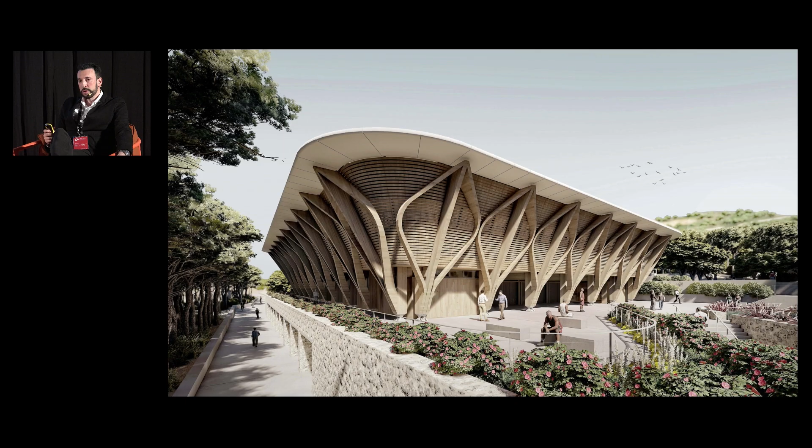Not for the award itself, but as a symbolic milestone that timber probably could be the timber material of the 21st century. And for this reason, I would like to dedicate this award to Mr. Elias Angelopoulos, who is the organizer of the Architect Show and a very good friend and partner the last 20 years, an innovative mind and passionate about timber that we do a lot of trips and events together, and I'm really thankful. The second occurrence is that Andrew was my tutor in the Master in Mass Timber Design in the Institute for Advanced Architecture of Catalonia, and together with Rebecca, we had a great time. We absorbed a lot of information about how timber can work, design for disassembly, and all the different inventions that we can implement.

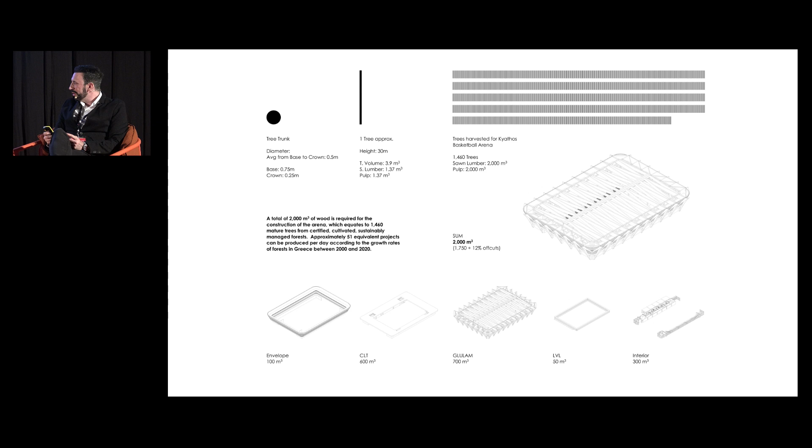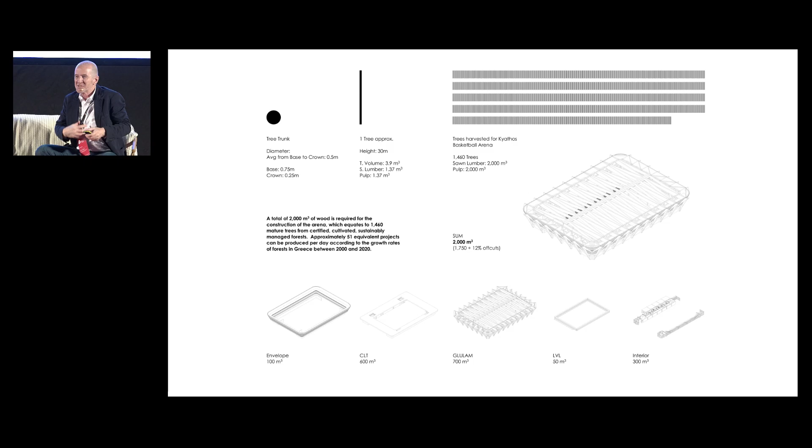Kalispera. I'm sorry to speak in English the whole way through. I think I might actually sit down. I don't think I've ever done a talk on a sofa. You can stand up if you want. Well, I think it's quite leisure.

So this is us. We're Waugh Thistleton architects. We are an architecture practice based in London. We work all over Europe and in the US. And since 2016, we've only designed and built timber buildings.

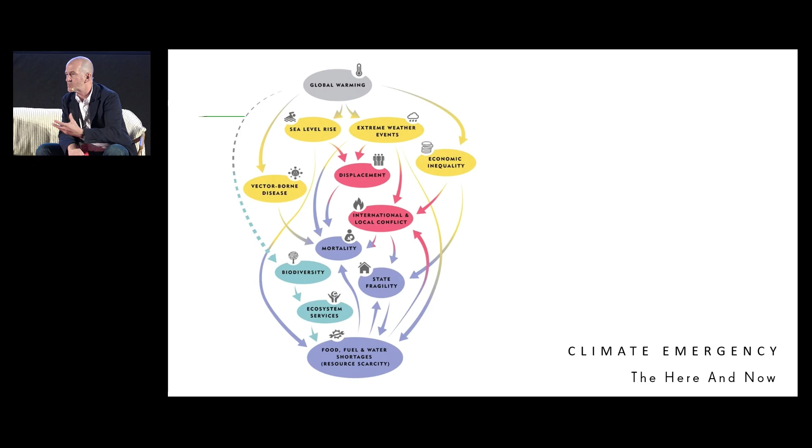The reason why we work in timber is primarily around climate change. That was the inspiration for us, the climate crisis. When people talk about climate change, you always see lots of graphs and Gantt charts and numbers. But actually, the reality of climate change is that it's here and now, that we are living in a climate crisis. And that climate crisis is evidenced by things like right-wing politicians and mass migration and all the turmoil of the world that we live in today.

The reason why I wanted to point this out is because architecture and construction play a major role in this. 40% of our global emissions are from the built environment, and by 2030, 50% of those will be around the building materials that we use. So even right now, when we're building less than we'll be building in the future, just the carbon emissions from making concrete are about 4 times the emissions from airline travel. So this is on us.

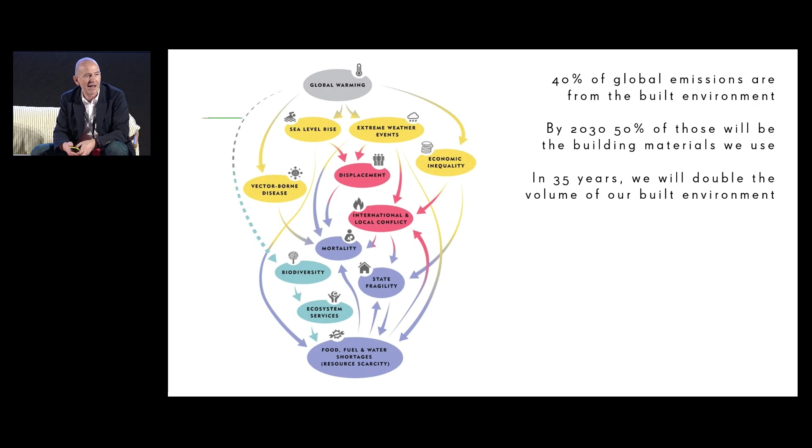This is on architects. This is our responsibility to make a difference, to make a change, and to really transform the way that we think about success in architecture. To think beyond the shocking, to think beyond the awesome, and to start to think about our responsibilities both socially and environmentally.

And so for us, that really is about 3 pillars of practice. That's about design, we are a design practice. That is about research, so about a third of our practice is pure research. And that's also about sharing knowledge, whether it's working with fantastic students and architects now, or doing talks like today. It's about sharing our knowledge, sharing our understanding, and learning from that process.

This began for us in 2003 when we built our first mass timber building, our first cross-laminated timber building. Since then, we've completed about 35 projects in timber. This one in 2008 was particularly important because it was a 9-story building, when really cross-laminated timber and glulam were used about small buildings, schools and health centers, single-story, 2-story buildings. In 2008, we built this 9-story building.

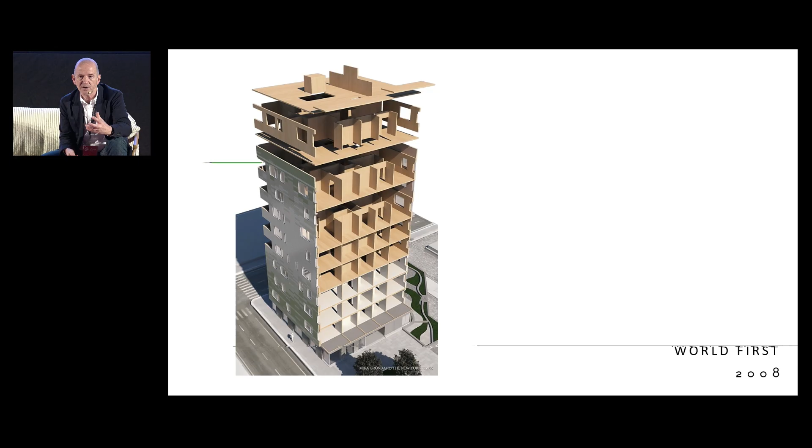The idea behind that was really thinking about how we could take a low-carbon material and how we could think about that material in terms of an urban scale.

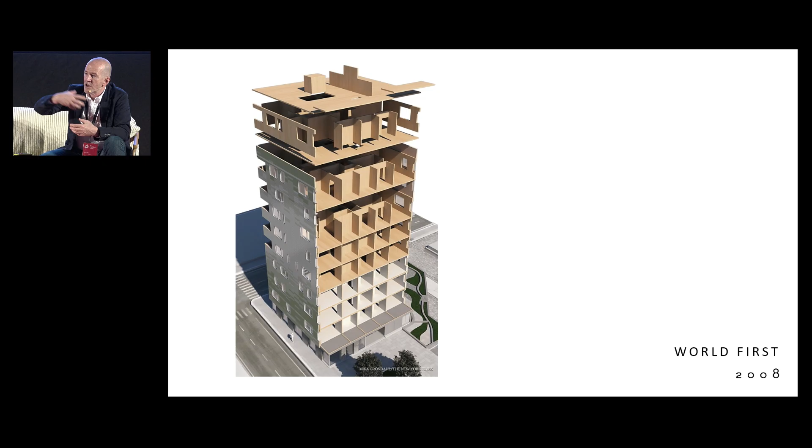How can we think about a viable alternative to concrete and steel in timber? This building saves over 1,000 tons of carbon dioxide stored in the timber of the building. It took 4 people 27 days to make, no tower crane, much fewer foundations, and it was a safe and

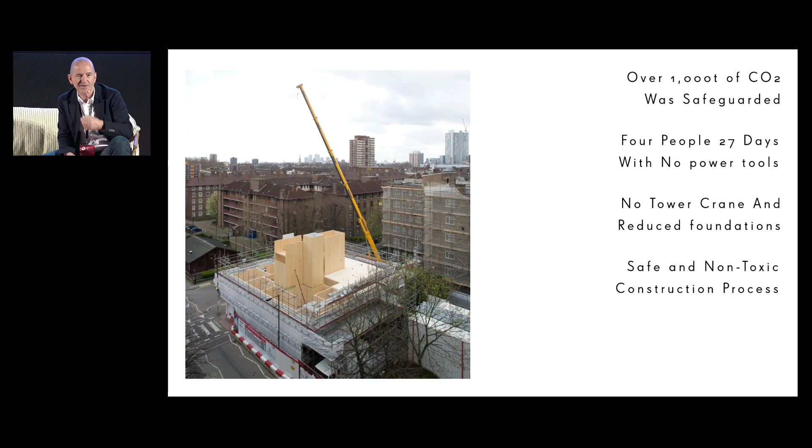Fast, non-toxic process. You can see a very simple construction, and it's 15 years ago now. A very simple construction, so just 7-centimeter angle brackets and 12-centimeter screws.

And the entire building, in fact, I walk past this building nearly every week, taking my daughter to swimming lessons. And so I see the building every week, and it's still there and still looking good.

But beyond the environmental was also the fact that it's very quiet, has great performance, and because it's prefabricated, not only took fewer people to build, but far fewer deliveries onto site.

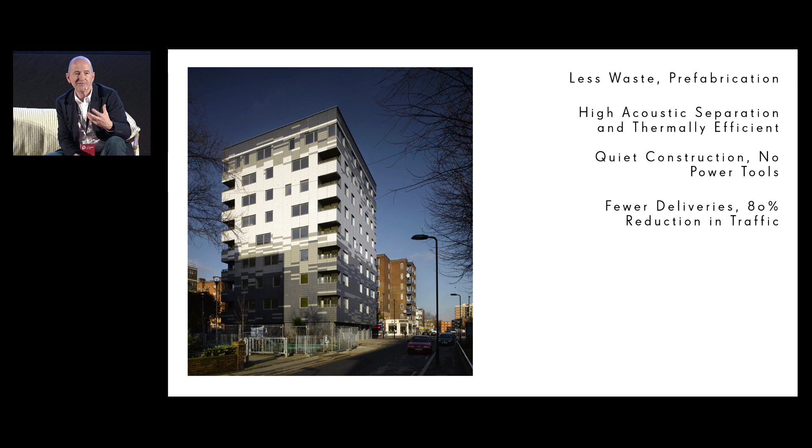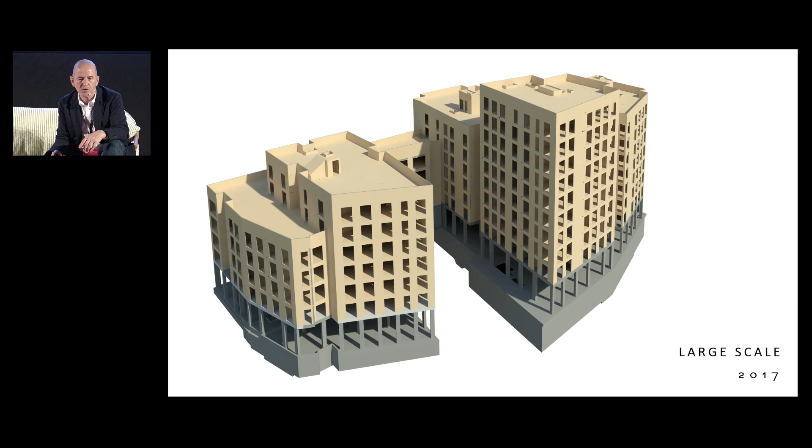And since then, the scale of the work that we've done has changed. This building in 2017 was 22,000 square meters, 10 stories tall. And in concrete, it would have weighed over 10,000 tons in concrete, but in timber weighed less than 2,000 tons.

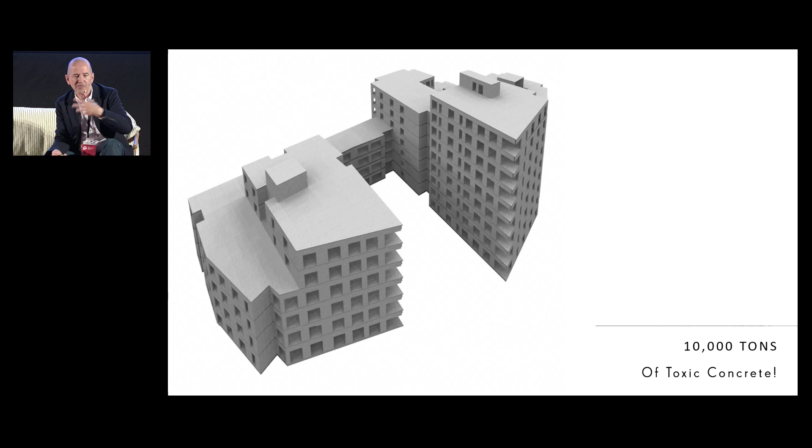So you can see the amount of deliveries to site, the amount of concrete involved, compared to just the less than 2,000 tons of timber that it took to build this building.

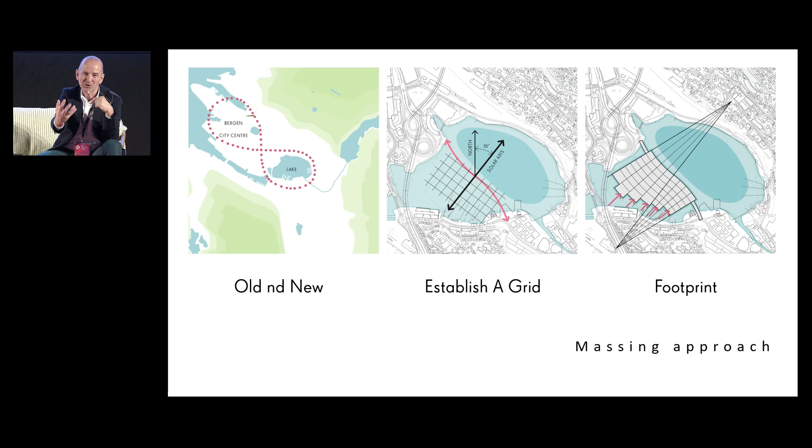We're looking at how we can actually, in northern Norway, a very different attitude towards the sun than in Greece. We're looking at how we can actually bring the most sunshine into the plan by angling the plan towards the southwest, broadening that footprint out to allow for the most amount of light that can come in to the buildings.

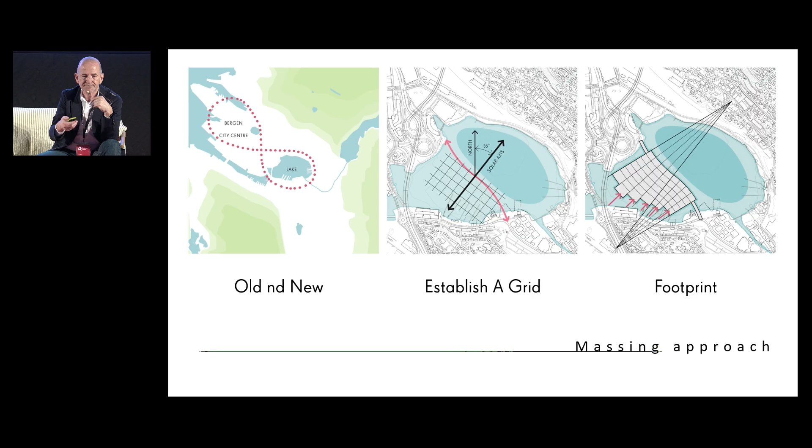Making sure that the heights of the buildings progress to the north west. And you can see, because these buildings are made of timber, because they're so light, that actually what we're doing here is we're using rubble, we're using rock from surrounding roadworks that are being done, and train work for new trains that are being done, using those as the foundations.

Working with local environmental scientists in order to actually bring oysters into the foundations, so the oysters will help clean the polluted lake, and then building these timber buildings on these oyster beds, making this connection between the old town and the new town. And we've also done a lot of office buildings as well.

So this one we completed a couple of years ago in central London. This is the black and white building. And this is entirely made of timber from the ground floor slab up. So we have a hardwood timber, LVL, and then a softwood timber, CLT, floor slabs and lifts, lift shafts, and

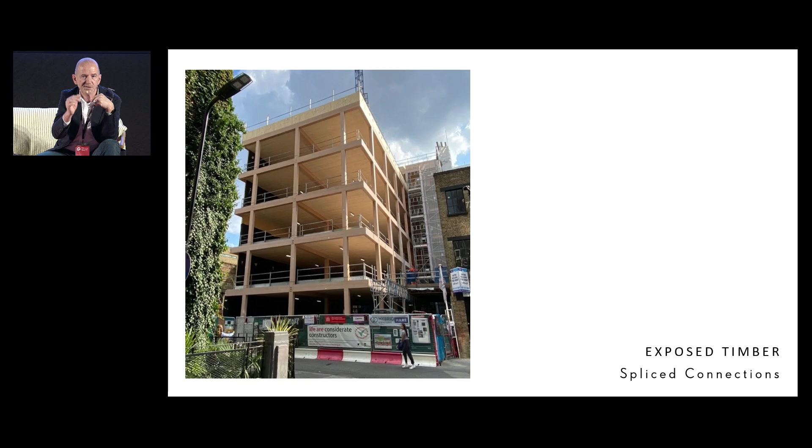External walls. So there are many different types of engineered timber, and what we try to do in our practice is to look at the different types of timber that we can use in order to use the material in the most effective way. And so with this building here, we have 893 components, each one of which can be

Taken apart at the end of the project and reused. And of those components, each one fits accurately in with the next, such that the entire building is 10 millimeters from one end to the other and 15 millimeters across.

So incredibly accurate process, done by 6 people in 14 weeks. So you can see the other thing that we've done is that we have completely clear glass into the building. So the daylight that comes into the building helps to actually kind of celebrate the interior of that building and the natural material of the timber.

So frequently, the glass that we use in office buildings especially has a heavy tint or has a low-E coating on the outside which reflects all the UV from the building. And especially in warmer climates, that obviously has been the solution in order to reduce the amount of overheating inside buildings.

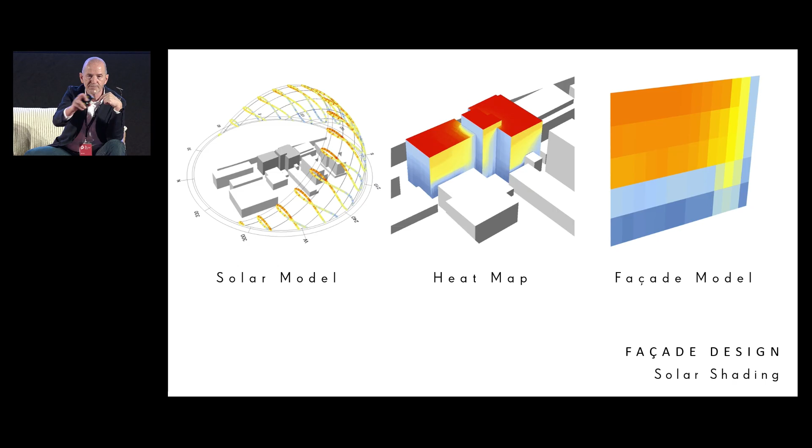But with this building, what we were able to do is actually to use the solar shading on the outside of the building to be able to have completely clear glass into the building.

By having clear glass into the building, that enabled us to benefit not only from natural daylight, but also from the health and well-being, the natural benefits of working with a natural material, and how that actually enhances people's sense of well-being, sense of enjoyment, helps reduce stress, helps people feel better about where they are, what they're doing. You can recognize the time of day outside, etc.

So across the building, we put it in a solar model and then measured that on a heat map across the facade, and then used the solar shading to reduce the amount of heat that came in during the summer, but maximize the amount of daylight that came in during the winter.

Across the facade, we have 16 different depths and frequencies and orientations, vertical and horizontal, of timber across the building. That was made with a thermally modified North American tulip wood, a very stable, quite lightweight hardwood. You can see here on the south face of the building where the solar shades are horizontal, and then on the east face, west face where they're vertical.

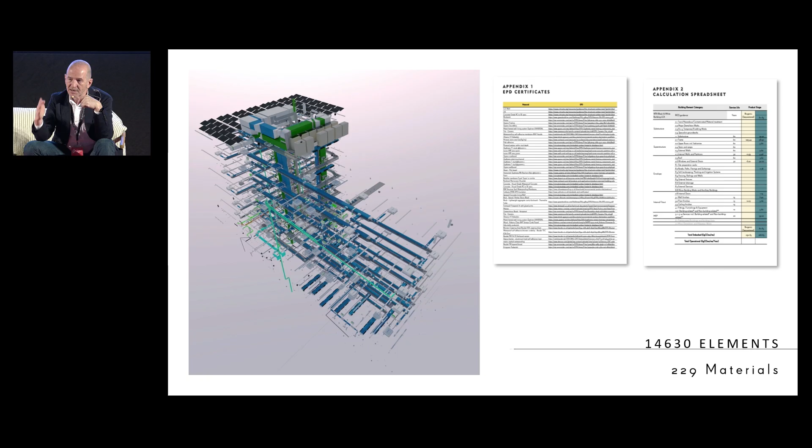We also, as we design, calculate the carbon. We understand what each design decision that we make in the process of considering different opportunities for the building, what the carbon implications of each one will be. So we're constantly monitoring for carbon as you would monitor for cost in a project.

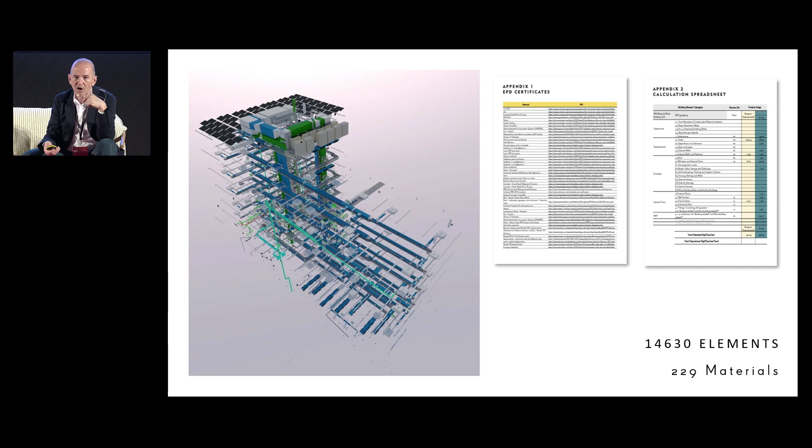As we go through, we're using the BIM software that we have to quantify the amounts of carbon that we're using. And then we publish that carbon data at the end of each project so people can understand not only how much carbon has gone into it, how we're making decisions to save that carbon, but also how the materials within the building can be reused.

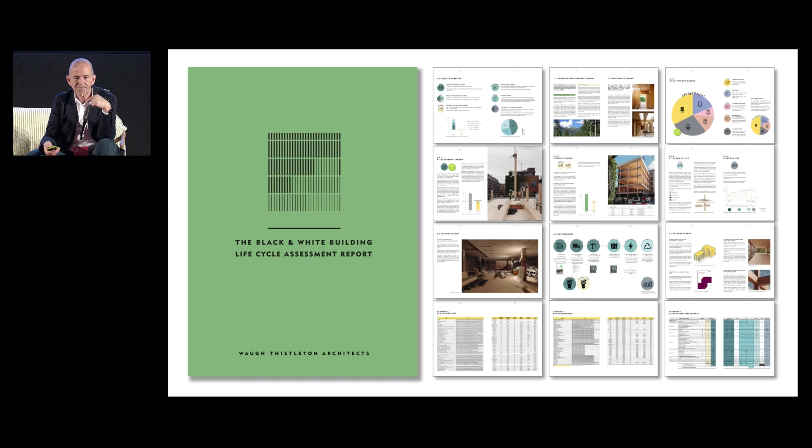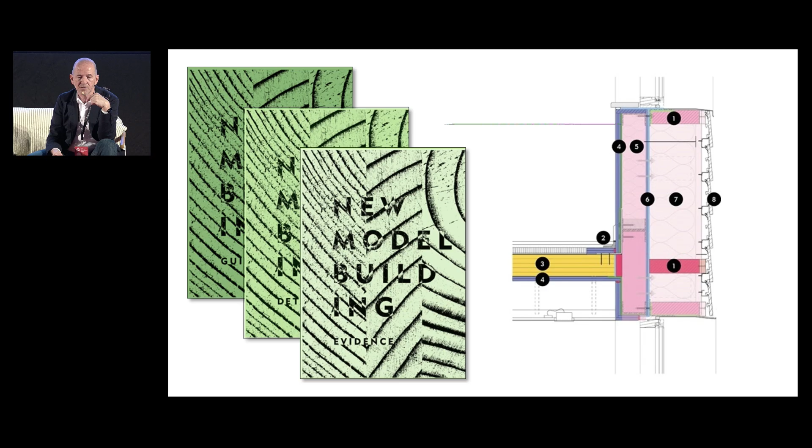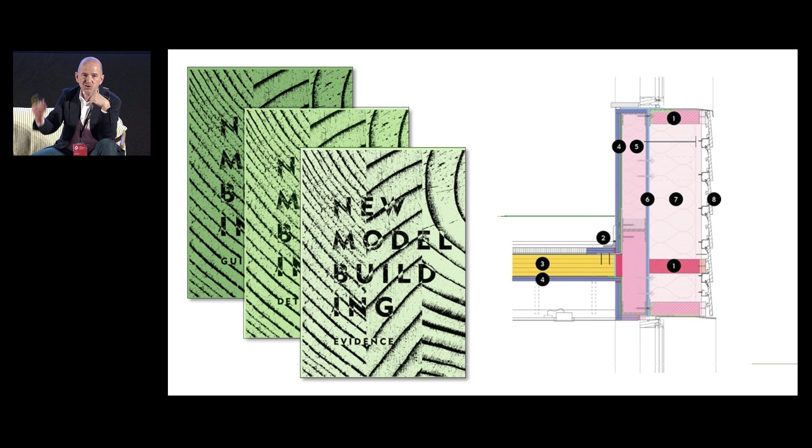We've done a lot of research within the practice over the last 10 years, and all of that research is available on our website and can be downloaded. This project is about designing low-cost housing across Europe, a new model building, each one specific to those regulations in each country. It's now available in the Netherlands, Italy, and Spain. This gives a whole construction system, both for architects, but also for builders, insurers, and building code officials to understand how to build in timber.

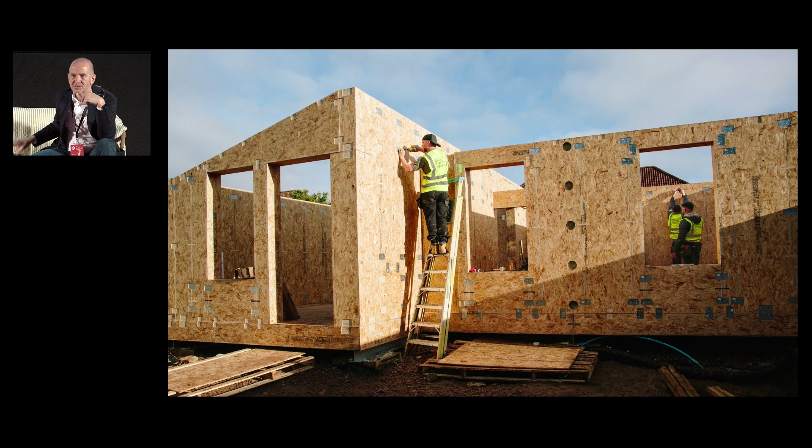We've done the same for offices. We've also worked with governments, this one with the Irish government, where we worked on a whole system for changing the Irish building regulations and promoting the procurement of timber for public buildings in Ireland. This one we've done with local communities in the UK to build affordable housing, where you can actually self-build houses. This is just to demonstrate that this material has an opportunity to be developed at every scale—the people building these houses are the people that will live in them.

I put these slides in last night, because talking to architects, I want us to consider the kind of materials that we use and where those materials come from and who makes them. The provenance of our construction materials is not something that we discuss in architecture. Who makes those materials for us? What are the impacts, what are the implications of making those choices?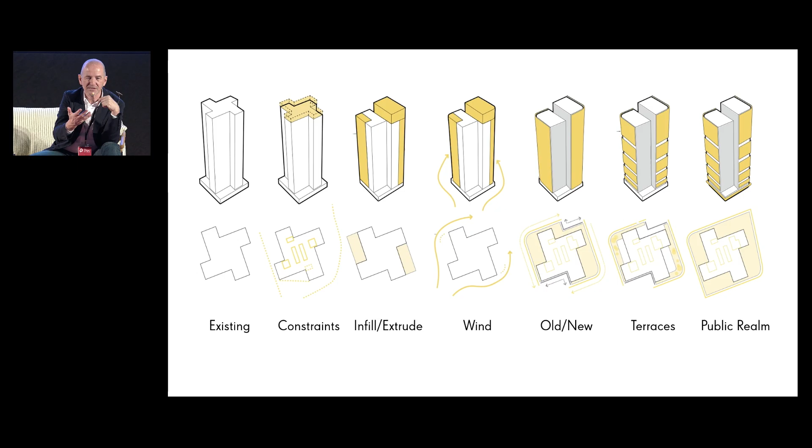We looked at providing terraces to help bring fresh air through and into the building. This is in Imperial. We were able to bring an additional 25,000 square meters of space into the building, 4 additional stories on top, for a total of about 83,000 square meters using about 9,000 cubic meters of timber. The entire project would take 30 months to build.

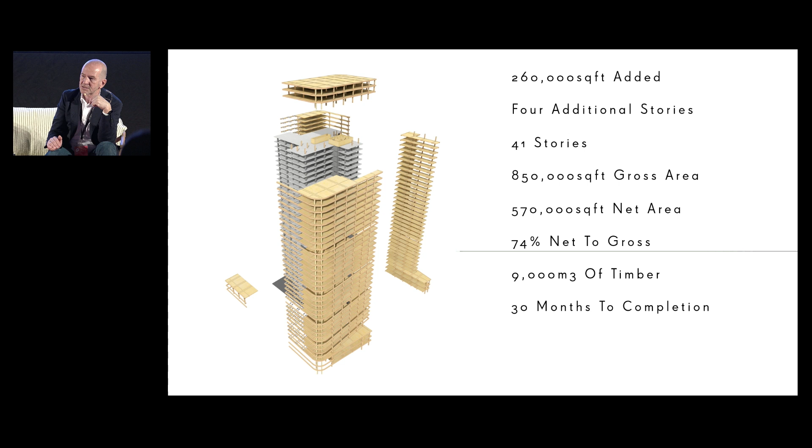So we don't need to touch the existing foundations at all. The timber structure is so light that we're able to build this without interrupting the existing foundations. And this would be the completed tower here.

You can see that what we've done is retain some of the history of the existing building on the internal corners, and then the new building is rounded on the edges, either side.

On time and a very inspiring lecture. Thank you, Andrew.

I would like to ask some questions about the process you apply in the office, especially the architectural language. We know that timber nowadays includes CLT, glulam, other bio-based materials and hybrid structures, but how does the aesthetic of timber combine with carbon performance and construction efficiency? How can we have all three together?